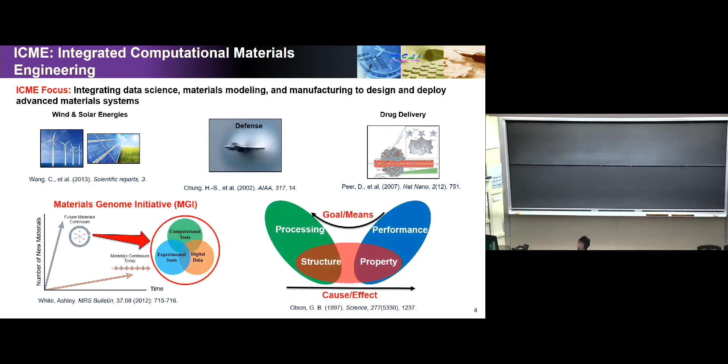And one of the reasons, it's very interdisciplinary. Just working with my mechanics colleagues and manufacturing experts, you realize that there are a lot of issues, a lot of barriers here to integrate all these things together. So the need to handle this kind of interdisciplinary challenge is also evident in a new term you probably heard about called the Materials Genome Initiative, right?

You probably won't be able to see this very clearly. What is shown here, the MGI, the goal is really to integrate computational tools together with experimental tools as well as the digital data. And it's interesting to note that they play a different role in this process. You can think about it as the experimental tools or data try to bridge the gap of lack of knowledge when you're using a computer model, right?

Because when you build a computer model, there's always something that you're not able to capture correctly. So the experimental tools really try to bridge that lack-of-knowledge gap. So what role does digital data play? Or what we call data science, right? Data science is actually playing an important role when we have a lack of computing power, okay?

Even when we have a good model, we may not be able to simulate everything, especially when we consider uncertainty. So that's where data science plays, and that's where a lot of the research opportunities arise. I know that many of the audience here are also working on data science methods, right? Trying to bridge all these things together.

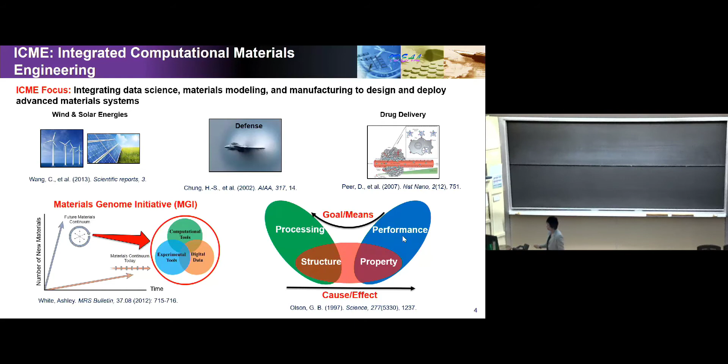Today, I'm going to focus mainly on how we incorporate uncertainty in this process when we assess the uncertainty on the property and on the performance. How do we do that? And what are some of the challenges associated with that? And the type of uncertainty I want to focus on is mainly related to structure. There could be a lot of uncertainty, like the loads and those things.

And I want to use this example. It's a project related to lightweight structure design using carbon fiber reinforced composite. This project is sponsored by DOE, and the main company that leads this effort is Ford. Northwestern has been working with Ford very closely for the past 4 years, and this project has just been completed.

It's a multi-scale problem if you think about it at each different scale level. The lowest picture shows the microstructure with fiber. The matrix is epoxy. So there's a design problem associated with what kind of epoxy you use. And I have a colleague here who does molecular dynamics simulation.

Going one level up, you're talking about design decisions that can be made for the laminate. So there's architecture design in terms of the angle, how many layers, things like that. And going up, that's the component design, which is usually related to the topology of a structure, right? Traditionally, mechanical engineers only work at this macro scale, the highest level, and we assume the material is the same everywhere, okay?

But in reality, they're very different. And one major source of the difference, or the variation, is actually caused by manufacturing. Because if you think about a part that has a shape, after you apply the manufacturing processing condition, at each different location the structure can be very different. For example, the fiber angle is different at different locations after you do the preforming. So how do you take into account those variations?

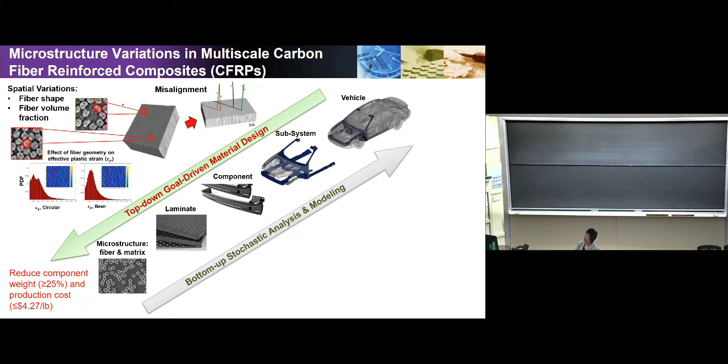And there's thousands of fibers if you take out a single point, and there's a misalignment issue. So there's literature discussing how the misalignment could lead to damage behavior at the end. So how do we take into account this kind of variation? That's the subject that I want to discuss today and show you some of the methods.

So when we start to take into account the variation, we're talking about the constitutive relationship being stochastic. So what is a constitutive relationship? If you're not working in the material area, you can think about it just like a government has a constitution, right? The constitutive relationship determines the material behavior. It could be linear elastic behavior all the way to nonlinear plastic behavior. So there's a stress-strain curve showing here. I show a bunch of curves, which means there's stochasticity there. But in general, the stress-strain relationship represents the constitutive relationship of the material behavior.

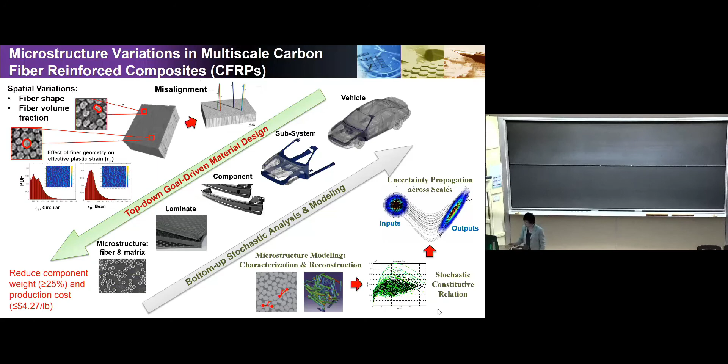So this is actually a critical link between different scale levels. So I'm going to show you how we build a stochastic constitutive relationship model to take into account the microstructural variation, and then all the way up to the highest level scale impact. In this process, we have considered many different composites like unidirectional, SMC, woven. The woven is the most complicated one, where you have different fibers woven together, right? They're kind of tangled together.

And in each of these cases, you can see there's different sources of variation. The non-uniform distribution represents that the volume fraction can be very different at different locations. So all these fibers have this issue. And then if you have the UD composite, you also have the fiber waviness that can introduce a large deviation in the performance, and also the fiber misalignment.

So waviness and misalignment are two different concepts. Okay? A fiber can be wavy. Misalignment means how it deviates from the perfect location. So the perfect location can be wavy, but then the deviation from there is called the fiber misalignment. I think I have a picture later on to show the misalignment situation.

So we want to understand the relative importance of all these different variations and their impact on the part. Really, we're talking about at each different location, the property is different due to the structure variations. So our solution is to create a surrogate or meta model-based database so that we can say for any given structure, this is going to be the property. Okay? And this meta model also takes into account the spatial variation. So that's quite different from the traditional deterministic meta model. We'd like to take into account the impact of the structural variation in this model.

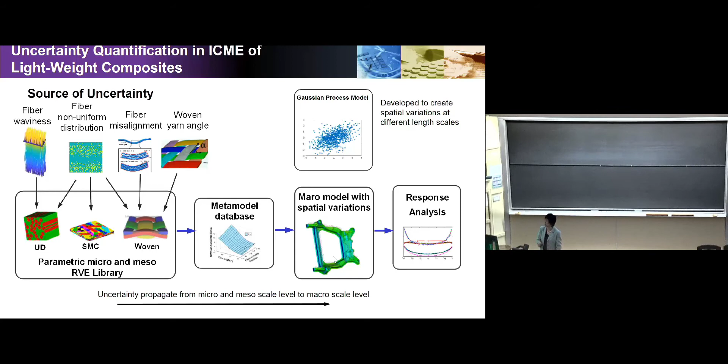And this is another motivating case to explain why it's so important to consider the microstructure variation from one location to another. That's an additive manufacturing process where my colleague Greg Wagner's group has been developing simulation codes that run three sets of simulations, starting from the toolpath generation to the melt pool, very much fluid dynamics based, and at the end to the microstructure at each different location. So what you see here in the picture is actually the grain structure at the different locations.

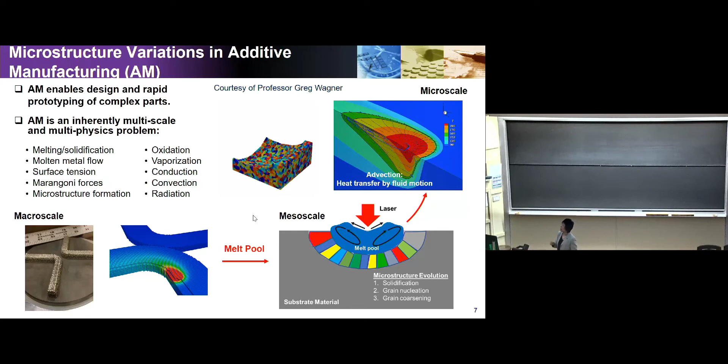Those kinds of simulations are very expensive, and there's a need to build a model that can quickly assess the behavior at different locations. And this microstructure variation can be spatially coupled, and there's also another type of structure that we need to consider, called defects.

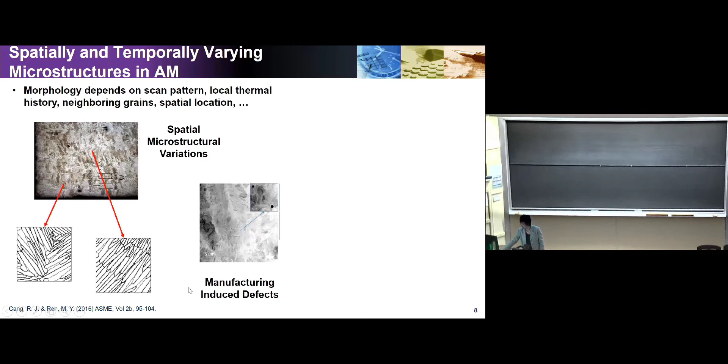Okay, so there's microstructure which relates to your material, so that's related to material design decisions, but there are also defects that you have to take into account when you think about the property. So in general, this shows it's also a function of time. You can see that the volume fraction at each different location at a different time also has variation. So different quantities show temporal variation as well as spatial variation. So it's high dimensional because of this reason. Temporally, spatially, there's variation, but they're very highly coupled.

So there are 3 sets of methods that I will discuss today that are related, in order to address this kind of uncertainty. The first one is that we need a method to characterize the microstructure as well as to do reconstruction that can digitally reproduce those inputs to the finite element simulations. So that's one category of work. The second category is, given the microstructure variation, how do we do uncertainty propagation throughout the different multi-scale levels? It's a very daunting problem and requires a lot of computing power. So how do we manage that kind of complexity?

The last subject I want to discuss is that all the models we have are not accurate. So we have experimental data. How do we use them in the context of multi-scale simulation, and try to improve our model so at the end it will have better predictions? So 3 subjects, they're kind of interrelated. The first subject I'm going to talk about very briefly. We have a review paper published in Progress in Materials Science last year that reviewed 4 or 5 different types of methods. So it also shows the progression of my group from one method to another.

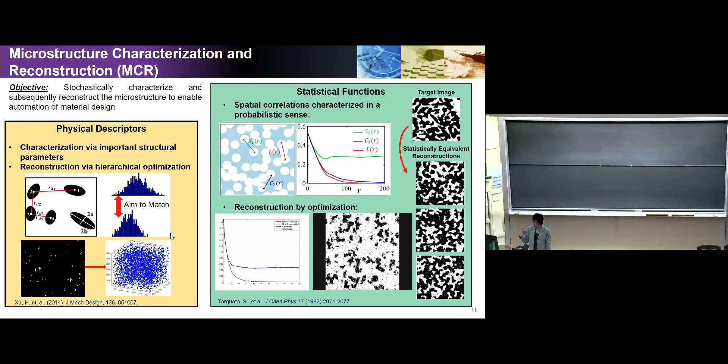So for irregular geometry, we developed two methods. One is model-based, based on supervised learning. Basically you put a small window, scan through the whole image, and build a machine learning model to predict 0 or 1 at a particular location. Using that model for reconstruction is very fast because it's a model-based approach. It's not good for design because it doesn't give you very explicit variables.

And then in recent years, we looked at the neural network approach. There are two cases. First, we use it for reconstruction. For that, we only need one image and use the transfer learning idea with an existing network called VGG19. You've probably heard about it; it's trained on animal images, but it's actually very powerful for materials. You can also use this for reconstruction.

So for one image, we can reconstruct a statistically equivalent image using this network. We also extended this one. Last year's paper was on using GAN, like the generative network, to do material design. So we could actually design material by just using the images rather than the parameters.

Okay, so I think many of you are familiar with the GAN idea, which is to build a model using some training data and then try to use it to create an optimal solution for the latent variable, right? And the latent variable can transfer back to an image.

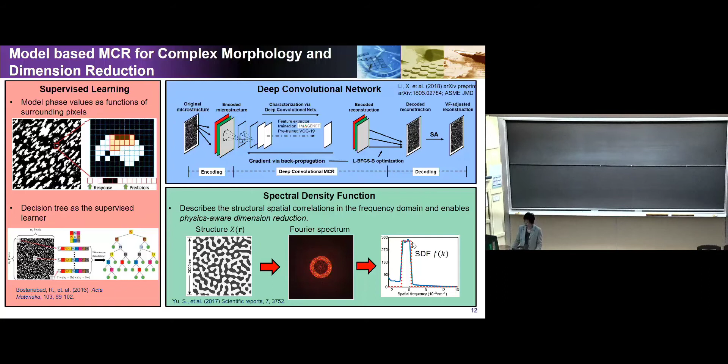And oftentimes we can create a very good map because there's a physics meaning behind it; the spectral density behavior is related to the dispersion, to the size, the geometry, local size, local geometry. So we're testing this method on many different material systems. I have some collaborators in the material area that I work with on this kind of design. Usually it's for optical systems and also for nanocomposite structures. It's a very powerful method.

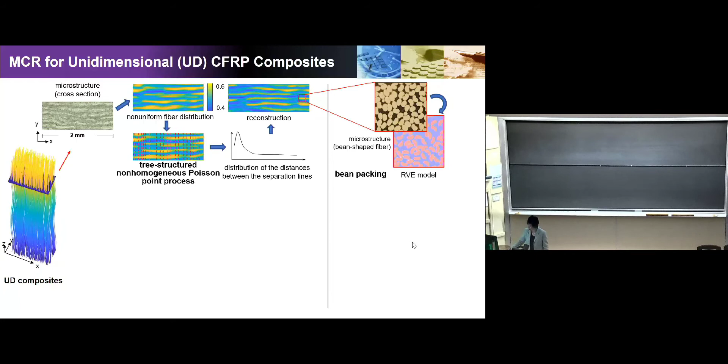And for the fiber problem, we actually find that it's not an easy problem when we think about the waviness and also the variation, like the misalignment issue. I'm showing a lot of pictures here, and it may be difficult to understand each of them. But what I want to say here is that this is work where the engineering comes in, that basically we have to work with the existing images.

So some of the real images I'm showing here, like this is a real image, this is a real image, and this is a real image, have a lot of practical issues. For example, the resolution of the image is usually not good and leads to a lot of lines that are disconnected, right? But in reality, they're connected. And the regular well-behaved uncertainty model doesn't fit this kind of variation.

So my students, this is more like problem-solving cases, where we're identifying the best model that can quantify the uncertainty. Those models involve tree structure, the non-homogeneous Poisson process. Here, for dealing with the imaging quality, we're using segmented linear regression to identify the wavelength pattern and the frequency associated with that. So a lot of engineering work in order to really account for the uncertainty based on the image. Okay? But most of the work actually starts from the image.

And on the right, you can see some packing algorithm we developed for packing the bean. Actually, it's not a trivial task if you want a very high volume fraction. It's an optimization problem. And also for packing the chips for SMC, sheet molding compound, we're using a Voronoi diagram-based approach. So this idea we borrow from other fields to serve the purpose we want, which is to generate what we call the statistically equivalent structure that matches the imaging data that we got.

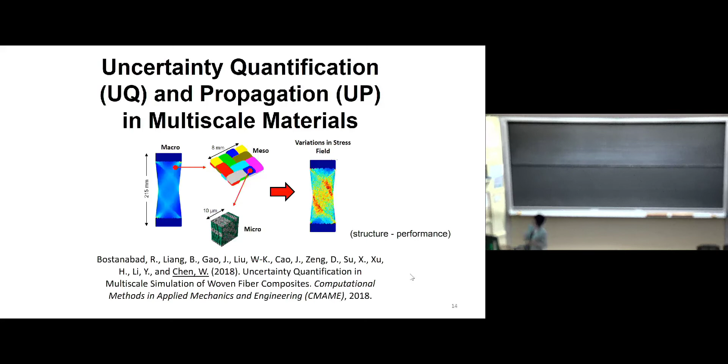So let's say we have those data, right? Let's say we have those images, we have those models. Now, how do we take those things into account when we assess their impact on the property? This paper was also published last year in CMAME and has a lot of description on that. But I want to just highlight a couple of things to understand the key idea behind it. Today I have been discussing a lot with some of you the PDE-based kind of problem, right?

So in the finite element-based analysis in this case, there's a PDE governing equation, but on the other hand, our analysis is very much black box based, okay? Because you discretize each point, like a window, you call them integration points. But there is an important relationship between different scales. Basically, the stress information is passed up and the strain passed down. And this is basically called a constitutive relationship.

So a key idea in our work is we do microstructure-based analysis, but the information passing from one scale level to another relies on the constitutive relationship as well as the uncertainty quantification associated with that. So the challenge here is really the cost, right? If you want to consider the detailed microstructure at each different scale level, I will show you later on the degree of dimensionality that's involved. It's very high dimensional, very computationally costly. One of my colleagues, Wing-Kam Liu, is actually developing methods to try to reduce that cost for this multi-scale analysis.

Another real challenge is that those uncertainties are spatially correlated because of the manufacturing process. Okay, so there's some kind of physical constraint that determines how these structures are different at different locations, and they're also coupled throughout the different scale levels. So when we think about uncertainty analysis at different scale levels, we have to make sure the structure information we give is compatible. So we are developing a method to make sure that is taken care of.

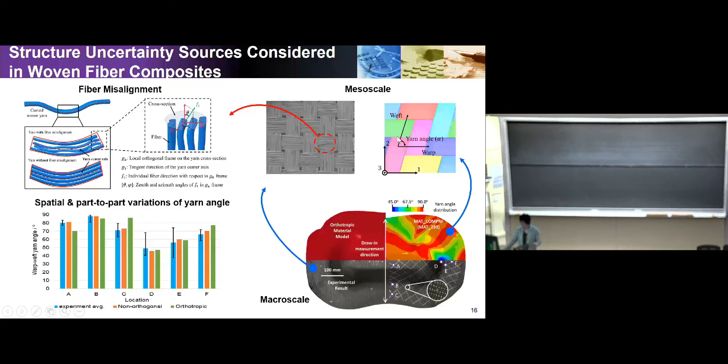And this misalignment is described by two different angles, theta and phi, with reference to the ideal location. So this is the deviation. The angle shows how much it deviates. So you can think about those as random variables, like theta, phi, as well as alpha. Those are the random variables in our problem, but they have coupling between them, okay?

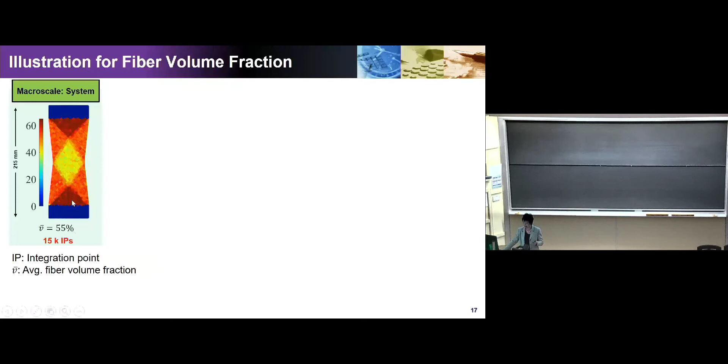So just illustrating why this is very computationally expensive, imagine that you have a specimen. Right now we're just using a simple coupon; our actual physical test is also at this coupon level, okay? So we have physical data related to that. The color represents volume fraction at different locations. So on average, they're 55% volume fraction, but the color shows the volume fraction is different at different locations. And there are 15,000 integration points here.

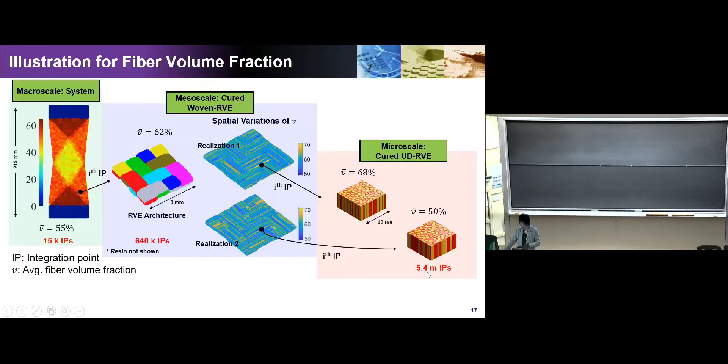So if you multiply, this is a nested situation, okay? So 15,000, this is 640K integration points, and this is 5.4 million integration points together. So it's a very large amount of work if you want to do all of them simultaneously using the original simulation code. So in prior work, we always saw people just treat them as a random variable, like volume fraction is a random variable. That doesn't really solve the problem, because if you think about a random variable, it's the same everywhere for a particular sample, okay?

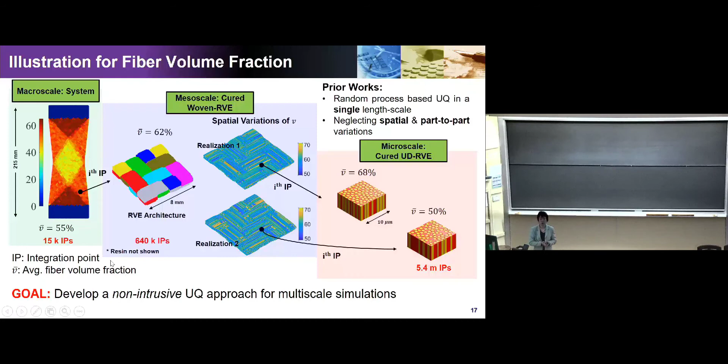So that would be just multiple realizations of different volume fraction, but everywhere the spatial variation is not considered at all. So we want to consider the spatial as well as part-to-part variation, and we want to develop a method which is non-intrusive, so that can take finite element as a black box.

So the method we use to quantify uncertainty is actually just a multi-response Gaussian random process. And I think many of you may be very familiar with this concept. This Gaussian random process, now I just show them as a single spatial variable, just one dimension, not in 3D, just x1. It shows at different locations there's a different volume fraction, there's a mean, the omega kind of shows how strongly from one location to another they're coupled, and there's a variance.

So when you have two quantities, like volume fraction and one of the angle deviations, now you see that there's a coupling, right? And the coupling is taken care of by this matrix here. So the diagonal shows the variation of the individual quantity, each random variable. Off diagonal shows the correlation. So in this case, it's negatively correlated. It actually has physical meaning behind it: the volume fraction increases and the misalignment angle usually decreases. Okay, so this kind of coupling has some physical

interpretation behind it. But in general, we're using a multi-response Gaussian random process, and we are using this nested, we call it spatial random process, to capture the coupling between different scale levels. Okay, so how does that work? Let me show you some more details.

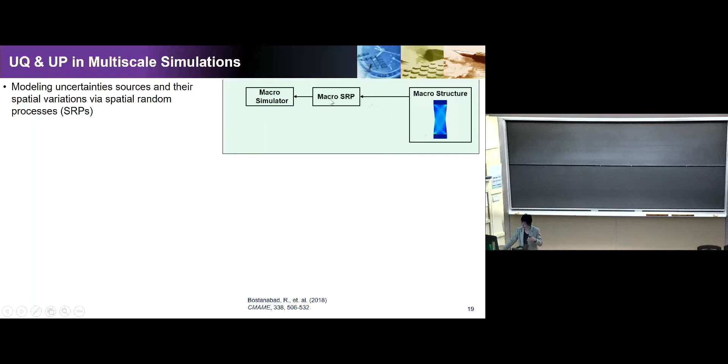So at the macroscale level, we create a spatial random process to simulate the structural variation for those 3 parameters. So they go through the macroscale simulation. At the mesoscale level, we also create lots of samples, right? For the mesoscale, that's the RVE level simulation. And then it also gives us the behavior, called the mesoscale simulator. And the most important thing is the coupling between them.

So one coupling is that for the structural variation, we're using top-down sampling. So the hyperparameter in the upper scale level becomes the response of the SRP at the lower scale level. Okay, so that's how they are coupled together. And then another coupling, it's one way, is that the mesoscale simulation, considering the mesoscale structure variation, will give us a surrogate model of the constitutive relationship at this mesoscale. And this constitutive relationship will be passed to the macroscale level to do macroscale simulation.

So at this scale level simulation, instead of coupling 2 FEMs together, I'm going to feed a surrogate model at this scale level to the macroscale, so that at each different point, it will just say, what is the structure, right? What are the inputs, like the microstructure definition, and then it will tell me what is the property. And this surrogate model is still based on homogenization, so that's one assumption you have to keep in mind. And we're working on a problem where homogenization may really break down, and how do you do that, right?

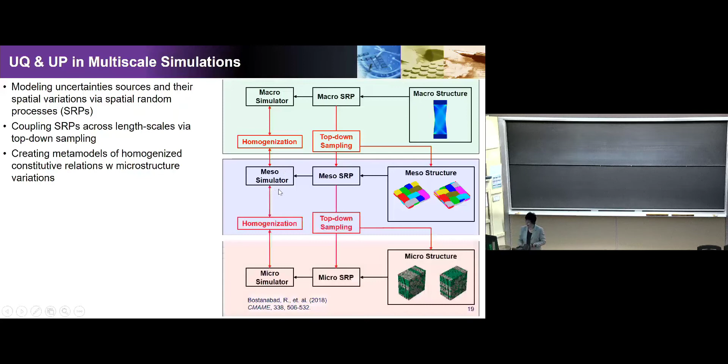So for this linear behavior I'm showing here, we're using a homogenization assumption that the RVE at the lower scale level will create a constitutive relationship metamodel that passes to the upper scale level. And the same thing happens in the coupling between meso and the microscale level. So there's also top-down sampling and then the feedback homogenization.

And in this process, we also used two approaches. One approach I already mentioned is metamodeling. So again, I call them engineering approaches, right? Where we have very large complexity, how do we manage it? So one is the metamodel, but different from the traditional metamodel, our inputs here could be statistical quantities, something related to the microstructure variations, the statistical parameters, rather than a deterministic kind of parameter.

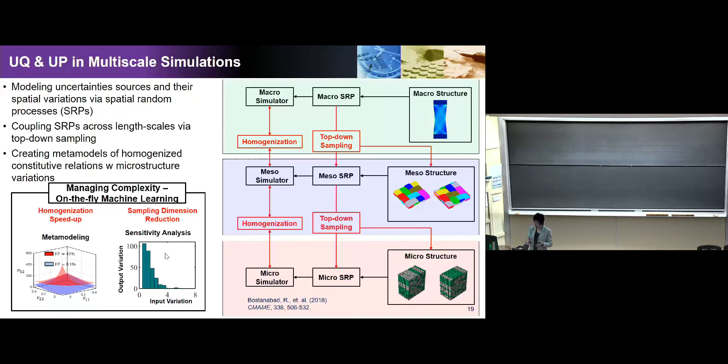Another thing we did, really an engineering approach, is sensitivity analysis. We actually did a lot of pre-screening tests to try to figure out what are the important variation sources, and then try to use them to reduce the complexity.

So this slide just basically shows how we do the coupling, or we call it top-down sampling. So an analogy is Google Maps, right? When you look at the macroscale, you try to make sure when you zoom in, things match up with the top level. And in the statistical sense, it's more difficult to accomplish. But we accomplish that by a nested SRP model.

So the hyperparameters for the highest scale level become the response of the multi-response GP model at the lower scale level. So the number of hyperparameters can increase from one scale level to another.

And some people may question how general a Gaussian random process is, right? A Gaussian random process can actually handle very non-normal distributions. If the marginal distribution doesn't follow a normal distribution, you could actually use a transformation to make it normal.

And if you think about how this is chained together, at the lower scale level the random field actually becomes non-stationary. Even though at the upper scale level the GP model is stationary, after you do this cascading, at the lower scale level it's really very non-stationary. So this is basically the model we use.

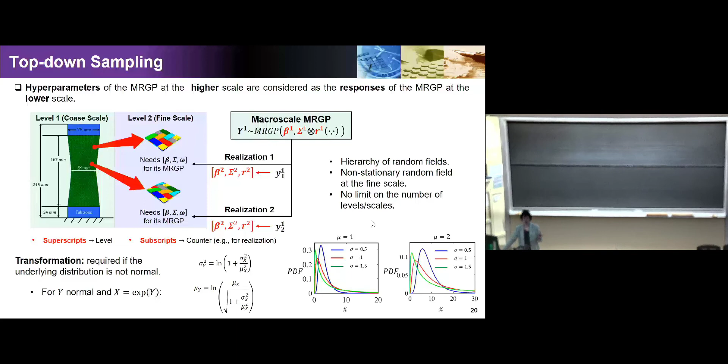You could use some other methods like copula, polynomial chaos functions, and those things. But there's a good reason that we use the GP model, because it's flexible and it's the most simplistic model that we think can represent the random field and also allow us to quantify the uncertainty. So let's talk a little bit more about the meta model we built. So exactly what is the meta model?

So the constitutive relationship is described by the stiffness matrix, right? I think people here probably know about Hooke's law. Hooke's law has K as the stiffness parameter, but in a very complex structure it is not a single variable. This matrix can have a maximum of 36 elements for a very complex structure.

So for this woven composite material, at the mesoscale level, we are using about 20, but some of them are symmetric. So there's some kind of symmetric property, so it's less than 20 variables. And those are basically the responses in our surrogate model.

And what we try to fit is these variables as a function of the material properties, as well as the statistical description of the microstructure that we're interested in. This statistical description, what we call uncertainty sources, takes into account the coupling and the variation in the system. And so that basically becomes an emulator in our problem.

And one nice thing about the GP model is it can quantify the uncertainty. It can also allow you to determine where you should pick more samples, right? Because we always have the case that we do not have enough samples, so we have to decide how to do this sequentially.

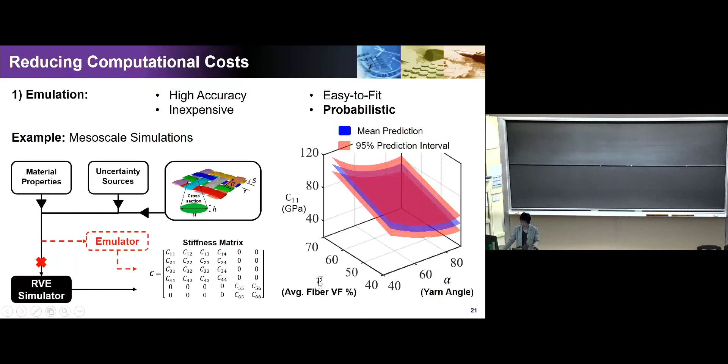So based on a certain amount of samples, we could actually show the 95% confidence interval for C11 as a function of the average fiber volume fraction as well as the yarn angle. Here is one example of a statistical quantity. We could also use the variance of the volume fraction as an input to take care of the statistical quantity.

For sensitivity analysis, we're using Sobol sensitivity analysis. This shows, for all those elements, C11 through about a dozen C elements listed here, what the impact of the different variables on those parameters is.

In this case, the fiber yarn angle, the red one, is always the most significant, and the next one is the matrix Young's modulus for the matrix property, and then the average volume fraction, the yellow one, is also quite critical. But we also find that theta, the misalignment angle, the green one, is not so critical for the kind of behavior we're interested in.

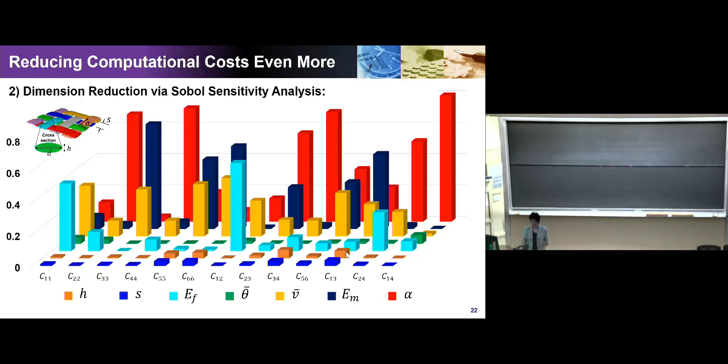What we're interested in in this case is linear elastic behavior. We're applying the load in different directions and trying to look at the constitutive relationship. This kind of exercise was done ahead of time, as the first step, and allows us to decide which variables to include in the model.

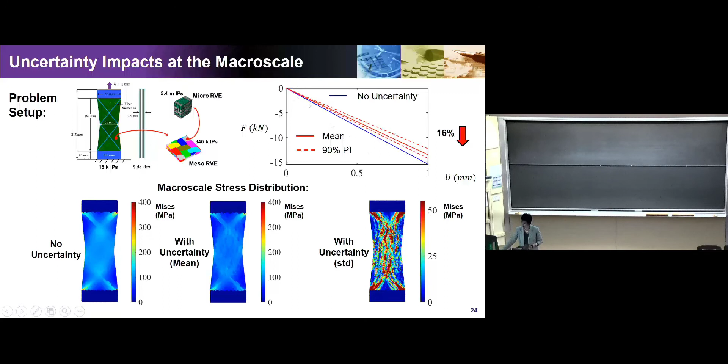So in the material behavior, it is really the relationship between the force and the displacement. This curve here shows when you have no uncertainty, that's the blue curve, and the red curve shows the mean when you consider uncertainty, and the dashed line shows the 90% confidence interval. So you can see that when you consider the uncertainty, there's a higher stress level or distribution.

So this is no uncertainty, that's the stress profile. And this is when you consider the uncertainty, that's the mean. So the mean profile is still very close to when you have no uncertainty. But that's basically the standard deviation of the stress level. So that's really the impact of uncertainty. We only looked at two moments, the mean and the variance. And you can see that when you take into account the uncertainty, it indeed introduces more stress concentration at certain levels.

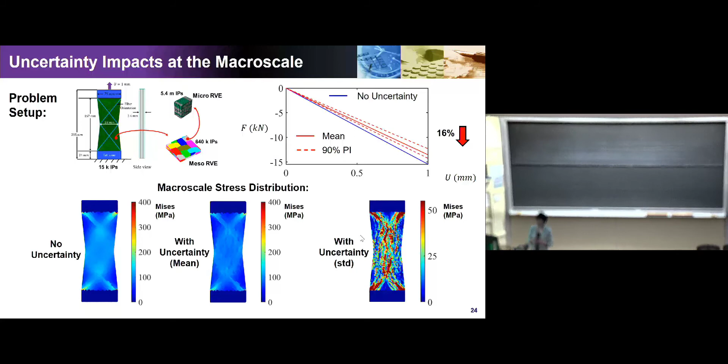So the next step for us is really to try to take into account more nonlinear plastic behavior, as well as defects, when you think about introducing voids at different locations, right? And how do you do sampling? It becomes tricky. And also when you're thinking about nonlinear behavior, the constitutive relationship is also path dependent. You have to take into account the past, so it becomes more dynamic. So some dynamic modeling technique needs to be taken into account.

So just a summary of what I just talked about on this subject. Basically, we developed a non-intrusive approach that takes a finite element model as a black box at each scale level and accounts for multi-response and non-stationary uncertainty sources. It also allows us to assess the multi-scale effects from the micro, meso, all the way to the macro. And the physical insights gained are related to the hyperparameters in the GP model, because the GP model gives you some insights into the behavior compared to other methods like neural networks.

And we expect the impact to be more critical. The example I showed you, 16% variation, is not big, but when you think about nonlinear behavior, it can be quite catastrophic at certain locations.

So the last subject I want to discuss a little bit is model uncertainty quantification, and how we do that in this multi-scale context. This paper was also published last year, in Composites Science and Technology. So we are looking at how we use the data. This model is a manufacturing process model, really to simulate, given the manufacturing process conditions, like the temperature, how the structure varies from one location to another. So this is a thermal related process.

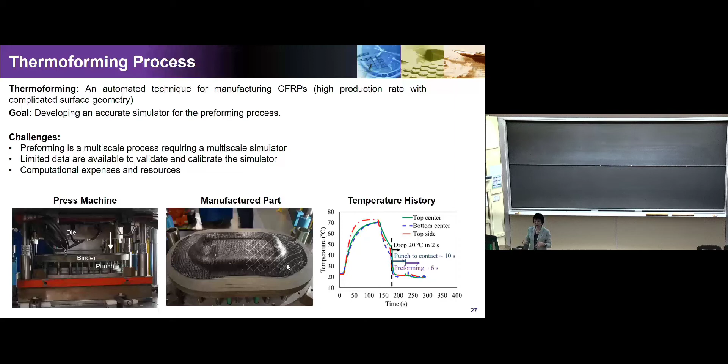It's a very flexible process to form the shape into different shapes that you want. But on the other hand, it's also very nonlinear because it involves plasticity. So in the past, most models did not consider the so-called tension shear coupling. They only considered the tension, but not the coupling with the shear. And they mostly used the least squares method to calibrate their model, just to fit the parameters. So what parameters do they calibrate?

So those parameters are kind of unknown and difficult to measure. So we want to infer what the parameters could be. The approach we're using is called Bayesian calibration and validation. And we differentiate the two because calibration uses data to try to infer the unknown model parameters, but validation uses new points that you didn't use in your calibration to see how good the calibration is.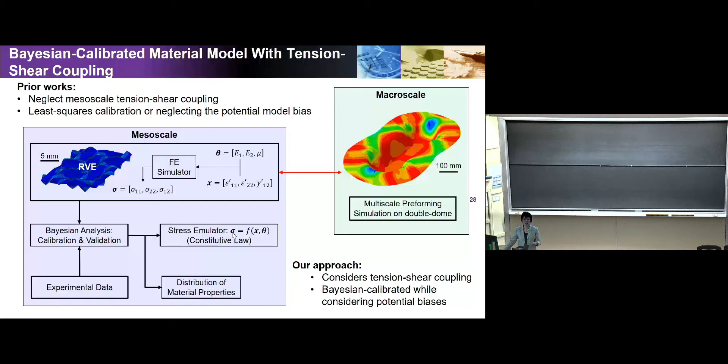And this model, calibrated model, basically becomes an emulator. And we also did validation using this emulator at the macroscale level, to see how good the predictive capability is. So there's certain things we try to assess, how good is this calibrated model. So the test data we have actually is very limited.

The data we used in calibration only involves the data from the uniaxial tension test. That means your shear angle is 0. Basically, you pull the specimen in one particular direction, and you look at how the sigma 11, the stress, changes as a function of different strain levels. Okay, so that is a curve that you record.

We also collected some very limited data, taking into account the shear behavior. That is the bias extension. So you can see now I marked the weft and the warp, there's two directions there. With that, we have some more data on how, when the shear angle changes, this behavior is different. We actually reserved this data for validation.

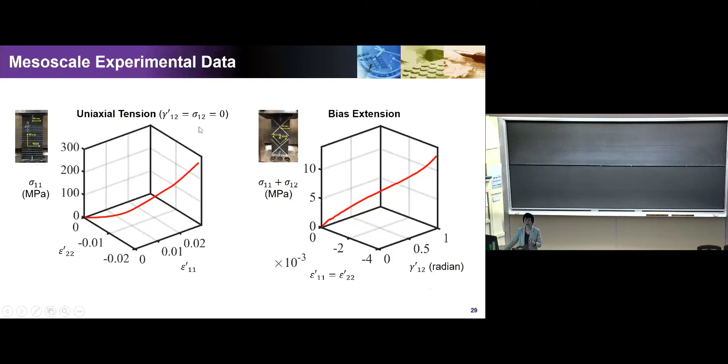Okay, we didn't use this data, the shear angle, even though that's a model input, gamma 12 is an input of the model. We didn't use that data at all. We used this to validate how good the calibrated model is. So this approach we're using, some people probably know the Kennedy-O'Hagan approach, right?

And basically it says that the experimental data is equal to the model prediction plus some bias function plus some physical experimental error. So the unknowns here are both theta as well as the bias function. So the bias function tries to capture the model error.

So that's the difference between our work and a lot of the existing work for model calibration: they take away this delta, they only look at theta and they try to lump all the uncertainty into theta. And we try to put them as a separate quantity to quantify uncertainty. And in this process, we use a modular Bayesian approach.

So first we build a surrogate model for our computer simulation, and then we also build another surrogate GP model for the bias, okay? And that one has very limited physical data, and for that reason, the GP model actually plays an important role because it quantifies the uncertainty associated with lack of physical data. I'm going to skip the detail here, but just walk you through the steps.

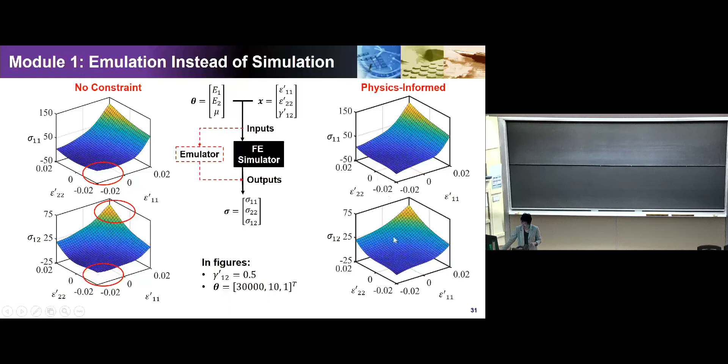The first step is to build the constitutive relationship just using the computer model simulation. The sigma is a function of the theta as well as the input x. And in this process, we also used some physics-based knowledge to put some constraints on how the stress and the strain may change at the corner, like very nonlinear kind of behavior. So if you do not put constraints, that's what you get. But the physics-informed one gives you a more accurate prediction.

And module 2 is to first identify the posterior for the calibration variable, and that is using basically the conditional probability and doing lots of random simulations. So you can see that for the prior, we just assign some uniform distribution based on experiments for those Young's moduli, and then you can see this is the posterior after taking into account the physical experiments. So there's still uncertainty.

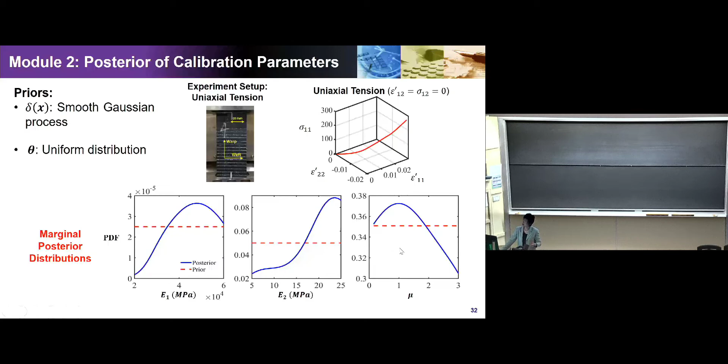The data we use is only the uniaxial tension test data. And those quantities are measured for the specimen. So then this tells us how much uncertainty we have. But in general, they're pretty much identifiable. In some other research, we actually talk about how we deal with non-identifiability.

So then we did the posterior on the whole function, which means we start to quantify the uncertainty of the bias function. So you can see that the bias function actually increases; in this case, when the epsilon goes up, the bias goes higher, okay? And this also shows you when the shear angle increases, this bias goes lower.

So the validation, the interesting part, is where we used the bias extension test data. So that's when the gamma is not equal to 0 anymore. So you can see that there's still some variation of the prediction after you did the model updating, but in general, that kind of uncertainty is quite acceptable. So this is an example which tells us that actually it's kind of interesting to use uniaxial in two directions, okay?

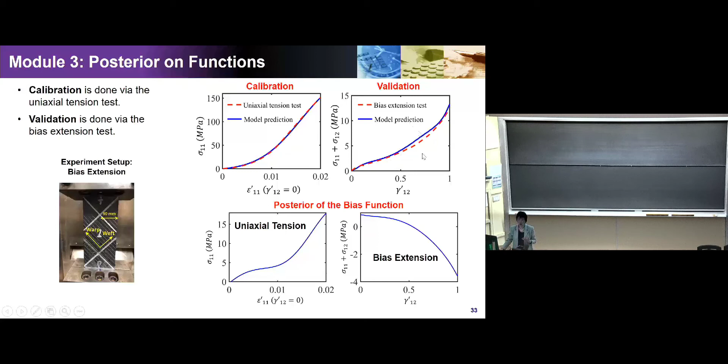This way and that way. Try to predict a behavior that has a shear angle that you do not have data, and it shows us that the uncertainty in this case is still tolerable, okay? And now we use it for the global validation, which is for the whole structure. That is, we're looking at the impact on this big piece, right?

So we looked at this, actually it shows the experiment data. It's a green curve, so it's kind of fluctuating. And the decoupled model is what people used in the literature, which does not consider tension and shear coupling. And the red curve is our calibrated multiscale model. So you can see that at the highest scale level, using the corrected material behavior, calibrated material behavior, we could actually predict very well the global behavior for the whole part.

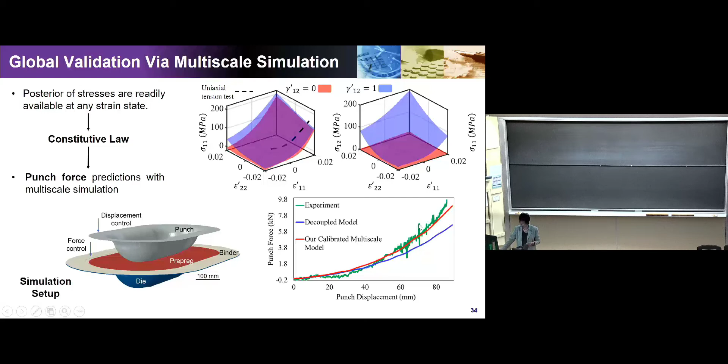So I'd like to summarize what we have discussed today. I have shown 3 different subjects. They are kind of interrelated. One is that in order to quantify the uncertainty of the impact of a microstructure, we have to first work on methods that can help us to characterize and also reconstruct the microstructure. And we need multiscale evaluation that is efficient, fast, that allows us to assess the impact of the lower scale behavior. And the Bayesian validation and calibration can play an important role when we have some physical data that we want to introduce.

And in general, the takeaway is that first, a multiscale material system is very, very complex. If you think about it, it's very difficult to decouple them. So in the design area, we actually have a lot of ways to manage uncertainty that try to decouple things into subsystems. There's really no subsystem here. Everything is related to everything else. So it's very complex. But the stochasticity can really play a critical role. That's where the uncertainty methods can really make a huge impact on taking into account the stochasticity. And the linear or nonlinear dimension reduction can help to significantly speed up the process.

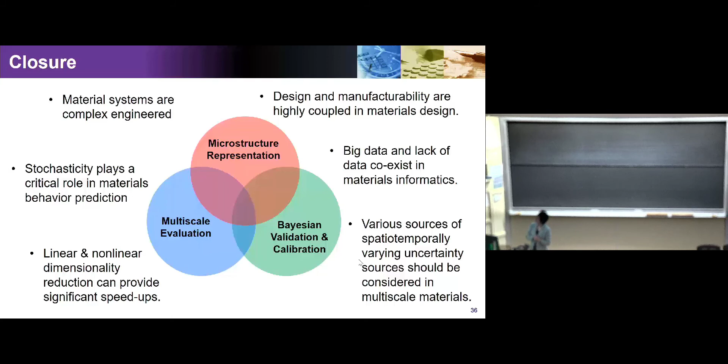So you need a method that really handles lack of data, which is the reason why I presented the Gaussian random process method. It's a very nice GP method to take into account lack of data, which allows us to decide how we do sampling. So there are various sources of uncertainty that need to be considered. It's not just spatially variant, it could be temporal. I haven't talked about the temporal kind of variation, but those are also very important to consider.